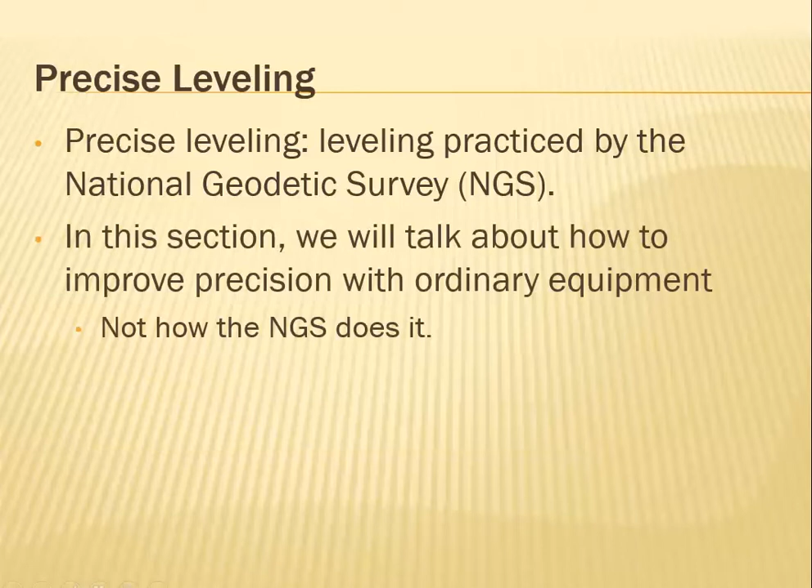So let's talk about something called, actually, and this shouldn't say profile leveling. This should be precise leveling. Profile leveling is next, so just ignore that. So some methods to increase precision involve something called shading.

Well, first of all, we already talked about some of these in the past, where we talked about setting the tripod legs firmly in solid ground, allowing the least amount of time between your backsight and your foresight readings, having very well determined turning points, limiting sight distances to 300 feet or less, avoiding leveling during strong winds or when the temperatures are very high, etc.

So on top of that, this section in the book goes through some of the other ones that are interesting, but we're gonna practice some of these in lab, or maybe you already have, but not necessarily look into these too closely. Some of these are shading the level. So shading the level involves keeping the level out of direct sunlight, etc.

Also, three-wire leveling. So the three wires are another name for the stadia hairs or your crosshairs in the telescope. So whenever you're looking, it's a good idea to use all three horizontal hairs so that you read them and average them, and it helps you take the correct reading.

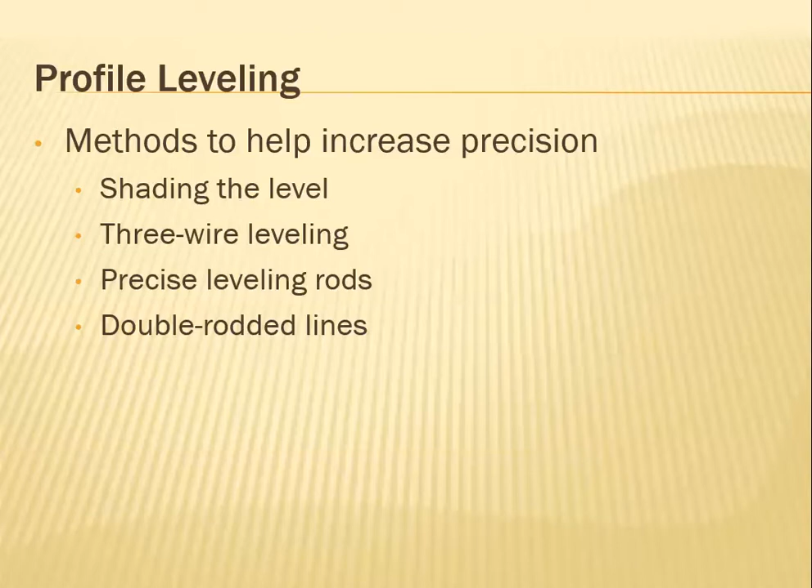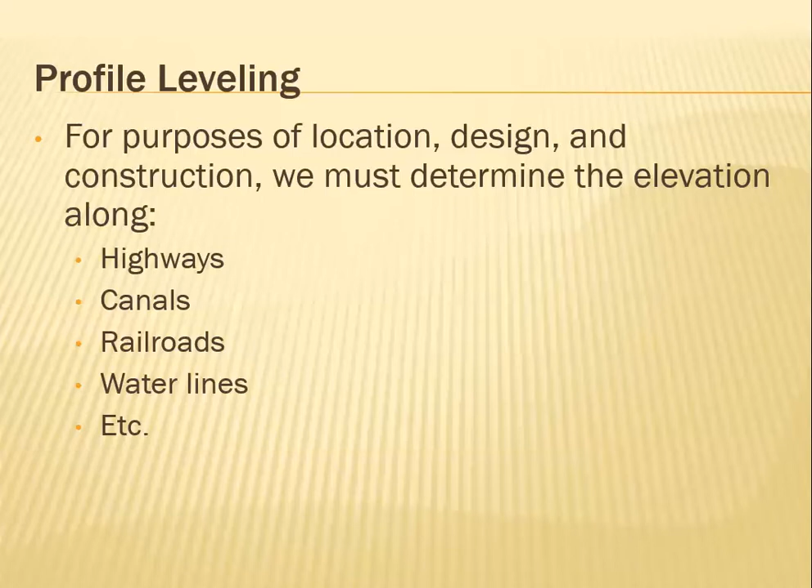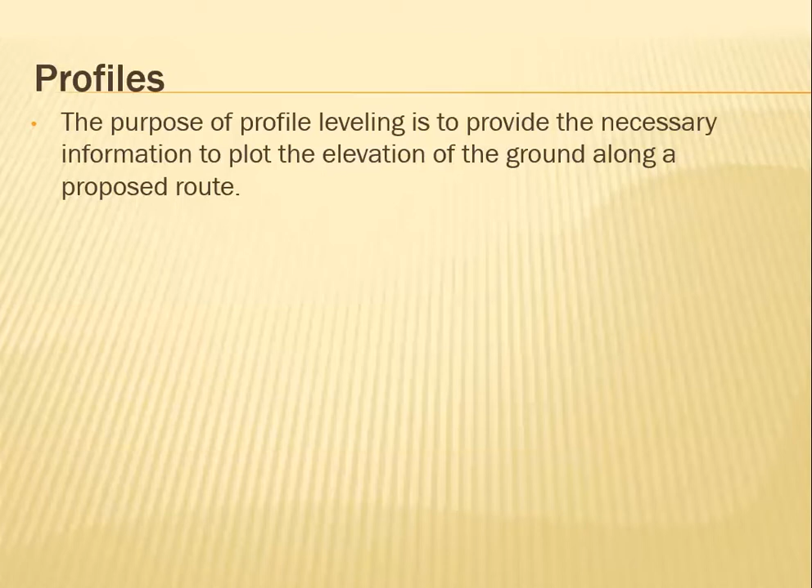So now we're going to talk about profile leveling. So profile leveling is for the purpose of location, design, and construction. We must determine the elevation along a continuous path, such as highways, canals, railroads, water lines, etc. So profile leveling is a process of determining the series of elevations along that fixed line. And we're not going to look too far into this, but know that the purpose of this is to provide the necessary information to plot the elevation of the ground along the proposed route.

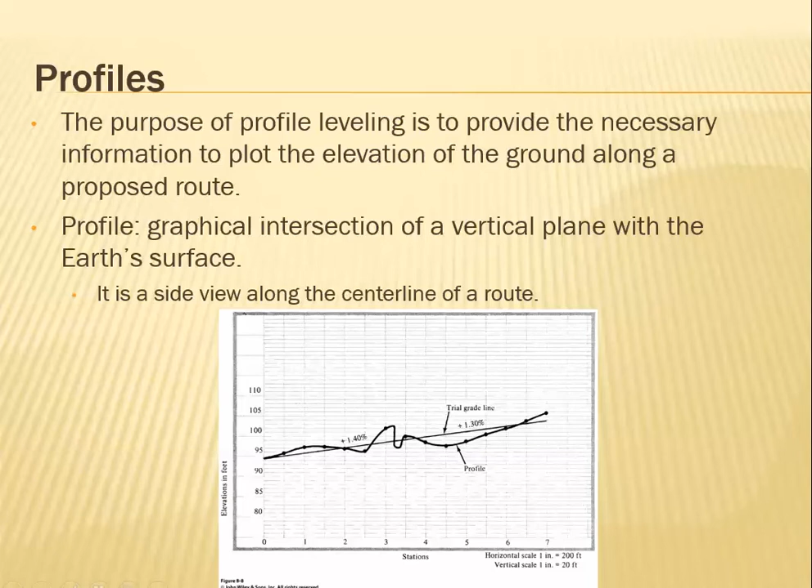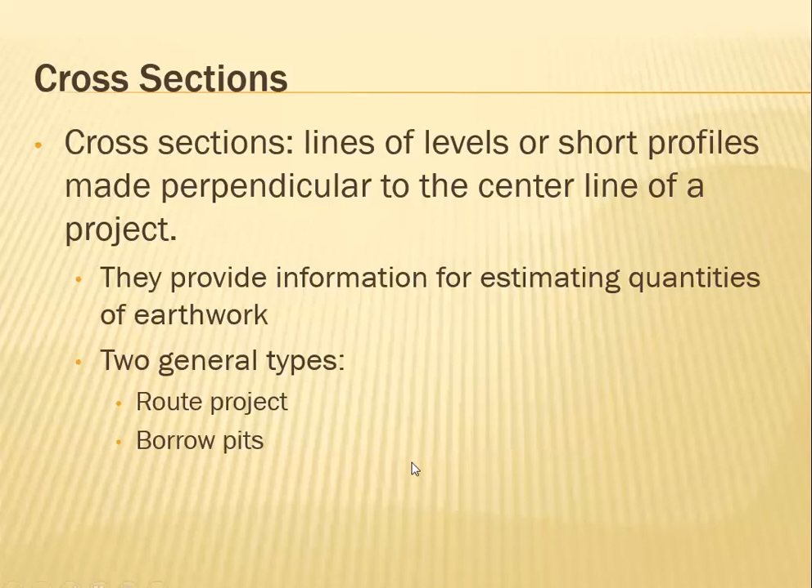So that's something very interesting that you could be doing, an application of plane surveying. And there's cross sections. Cross sections are lines of levels or short profiles made perpendicular to the center line of a project, and they help to estimate quantities of earthwork. So they're great for route projects and borrow pits. Now this is just for your information.

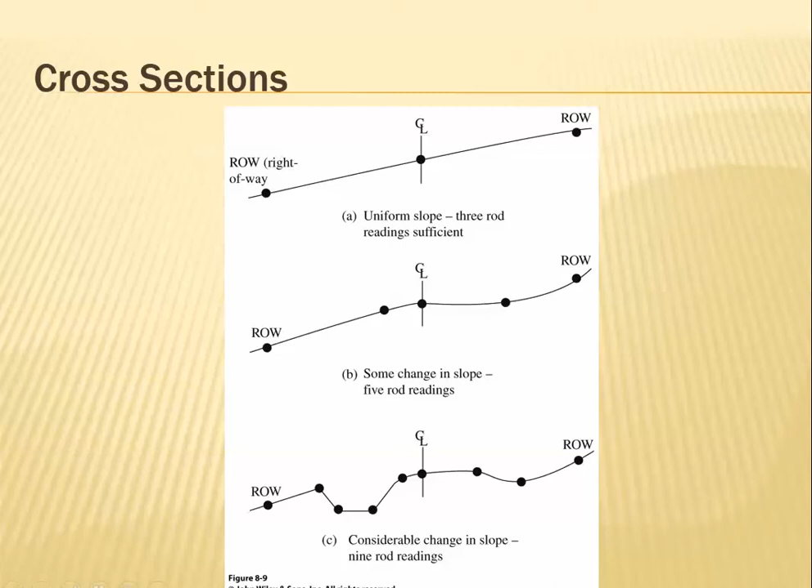So between here and here, there wasn't much of a change, so you could spread them out. But between here and here, there was a big one, and here. So another application of plane surveying. Let's talk about slope and grade for a second. We've talked about this before, but sometimes slope and grade, although they represent the same thing, look different.

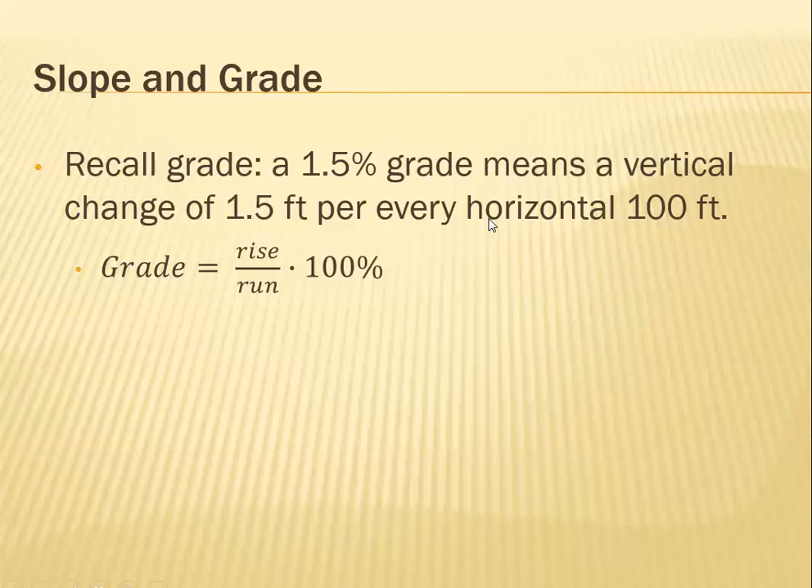So the grade, as we've said, like a 1.5% grade, means a vertical change of 1.5 feet for every horizontal 100 feet. In other words, it's rise over run times 100%. However, many times slope, and grade is a kind of slope, is represented as a ratio. So the slope is equal to run to rise, where rise is 1, so it's a unit ratio. For example, a grade of 2% has a slope of 50 to 1.

So you might be thinking, how? Well, a grade of 2% looks like this. Let's say we have a triangle; 2% is not very high. Let's say this is 100 feet right here, obviously not to scale, and this is 2 feet. So slope is equal to run, 100, over rise, 2. And we can simplify those numbers: 100 over 2 is 50 over 1. You might see this, so that's the only reason it's mentioned here.

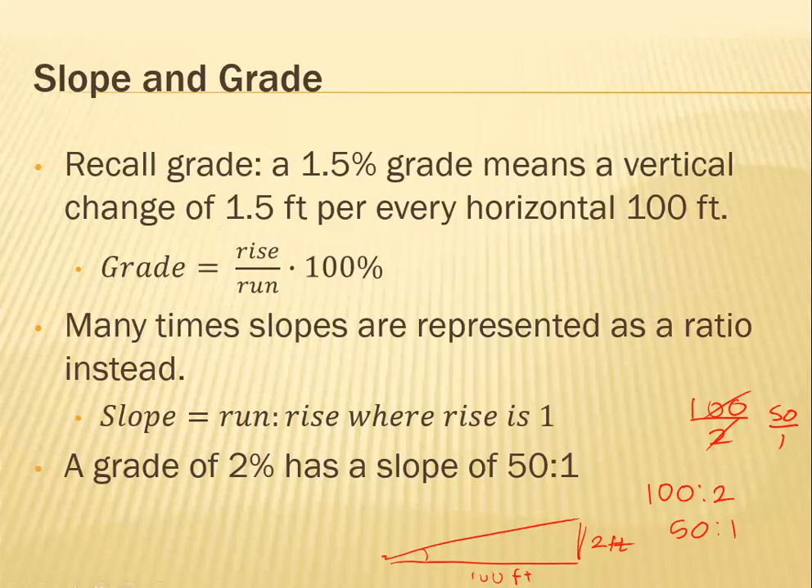So let's do one brief example. It says the station at the beginning point of a highway is 153+50. Now, you may see this notation. When you see it, ignore the plus sign. It refers to where we started doing stations, and then you have stations every so often. Let's say this is 15300, and this is 15350, which is written as 153+50.

And this is 15400, which will also look like this. Or you can do them every 25; you can do it various different ways. So just know that this is 15,350 or 16,225. So let's read this example. The station at the beginning point of a highway is 15,350. If the change in elevation to the end of the construction, at 162+25, is 42 feet, what is the average grade and slope over this distance?

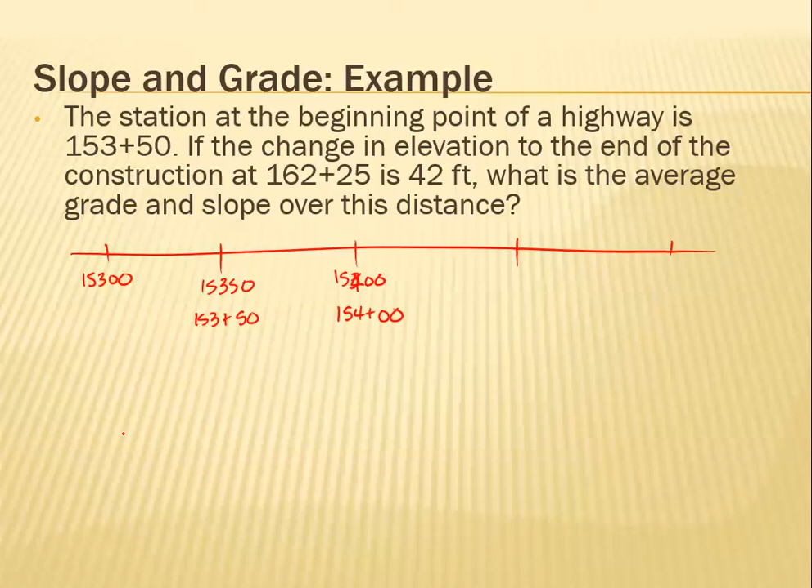So what this is telling me is the following. I have something like this, where this point right here is 15350, and this point right here is 16225. So the total distance from here to here is, yes, I have it, 875, and the difference in elevation is 42 feet. So what is the average grade and slope?

So for the grade, I'm not going to figure out that angle. Grade is equal to rise over run times 100%. So this is equal to 42 divided by 875 times 100%, and this gives me approximately 4.8%. Now slope, on the other hand, is 875 to 42, which I can simplify.

I'll use my calculator for this one: 875 divided by 42. It might not give you an even number, and here we don't have any decimals, so I'm just going to round it to the nearest one. This is 21 to 1, approximately. That's how a slope looks.